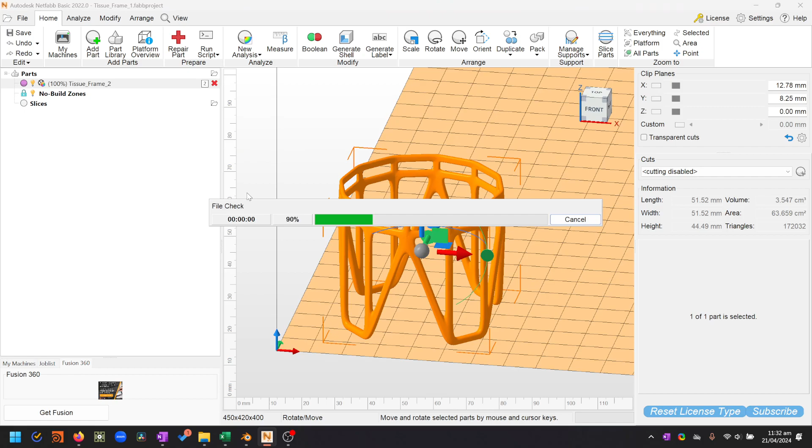So now that we're happy with this file in Netfabb, I can select it here and right click, and I can go export part as STL. So I'm going to click that, and it's going to give me some information about it. It's going to tell me the scale and everything, it's going to give me a place to submit to, and it's going to allow me to rename it. So I'm going to call this one print.

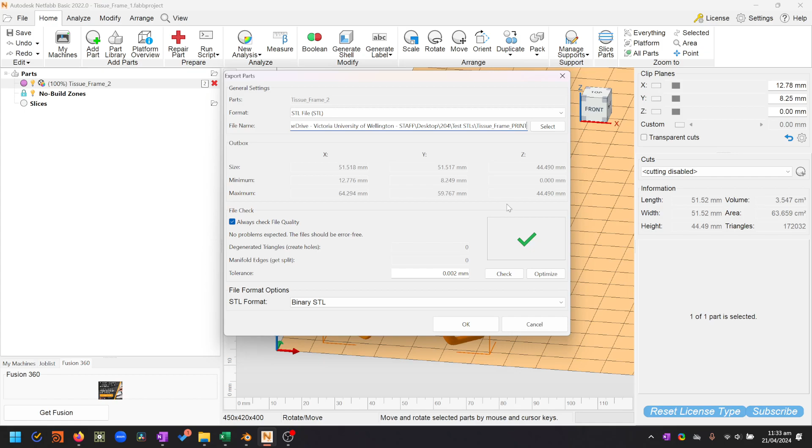And yeah, pretty much that's going to be it. As long as there's a good green tick there, then we're going to be happy with that. So let's click OK and export that.

Now let's check our file size here. So if I go to desktop, 204, test STLs, we can find our print, and you'll see that the file size is 8 megabytes, which is fine. That's perfect. And if we go in here and we actually look at our triangle count, we've got 172,000 triangles there, and that's our kind of hitting our 8 megabyte size.

So you can get away with quite a lot of detail, but I would highly recommend making sure that you're floating around 150 to maybe 250,000 triangles. As soon as things start to get over 500,000, then you're going to get towards the upper limits. And what is the upper limit? Well, if we go to Zelta 3D, we go to the website here.

What I would do is make an account, because you might use the service again in the future, and it'll make the process of getting yourself a quote a whole lot easier if you have an account.

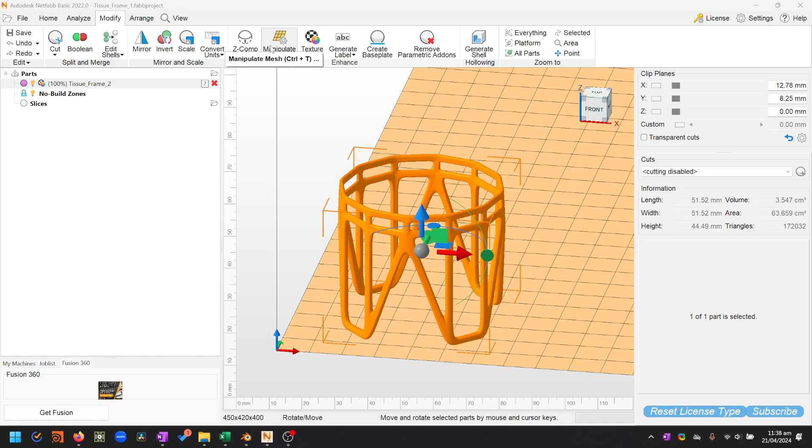Now, one of the ways we can do it is by finding our remesh or manipulate mesh here. I think there's a couple of other ways to do it as well, under prepare. Yeah, I would probably just use the remesh option here or the manipulate mesh command. So we can either select manipulate mesh here, or under modify we can also do it here. So if we click manipulate mesh, that'll give us a good preview of what our mesh structure is like at the moment.

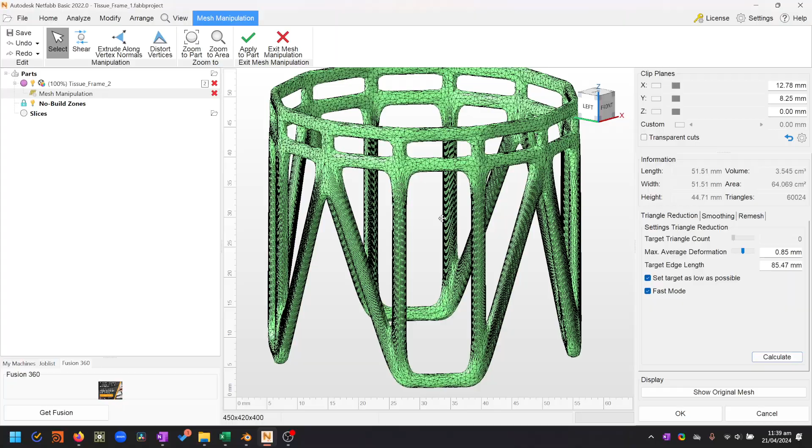And here we can do a triangle reduction by setting a few things, like target edge length. If we do this now, 85 millimeters as a target edge length is going to give us like 1 polygon remaining. So let's maybe reduce that down to 1 millimeter for now and hit calculate. And you can see it has reduced our mesh, but we've got really bad results up the top here, like some really rough, pretty awful results. And it's got us down to kind of 60,000 triangles, but 170,000 wasn't a problem in the beginning.

So I would suggest just using this process fairly sparingly, and if you're having issues with the polygon count, start with a reasonable target edge length. So maybe now we could go down to 0.5 of a millimeter and calculate that instead, and we could see what that'll do to our mesh here.

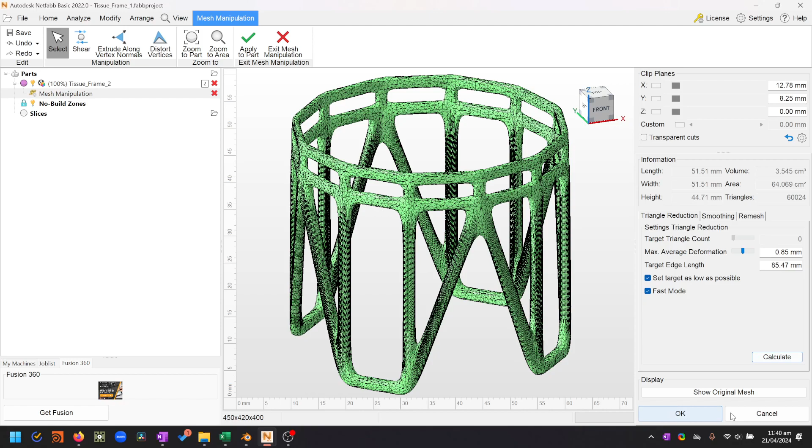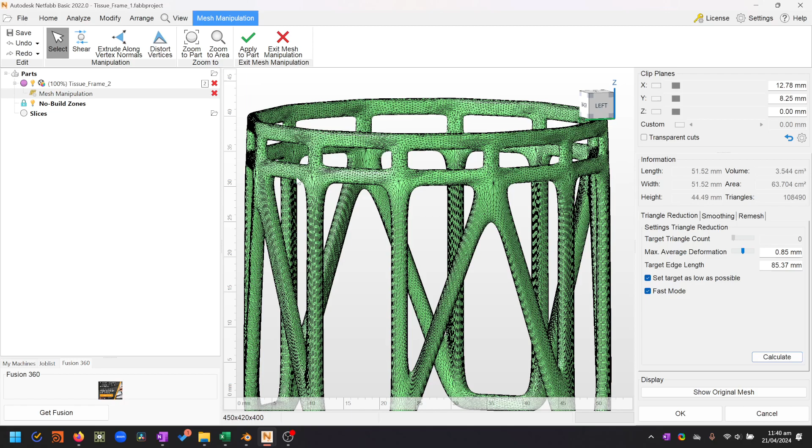Oops, maybe we need to just cancel that. Go manipulate mesh and try that again. So let's try 0.5 millimeters as our target edge length there. And you can see that we've gotten rid of a lot of that density and not lost too much of our definition. So at that scale, a target edge length of about 0.5 millimeters, or 0.3, 0.2, will probably give you reasonable results.

But again, it's going to depend on the complexity of that mesh. So you might have to do a little work if you've got a really high triangle count to get that mesh down to size. But again, it's going to be different for everybody.

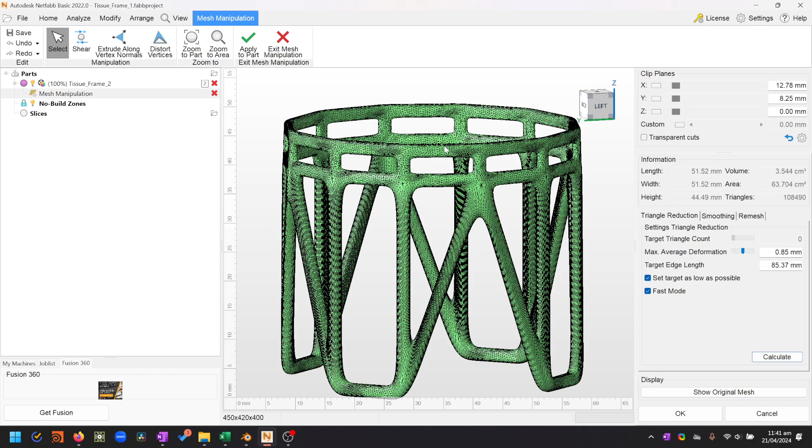The best thing you can do is come to class and talk to us about it so that we can actually look over your file as it is and help you work on it. It's not going to help if you just try and send us screenshots of stuff, it's probably going to be really tough for us to troubleshoot. So make sure that you're really engaged over the next couple of weeks because it's one of the most crucial times.

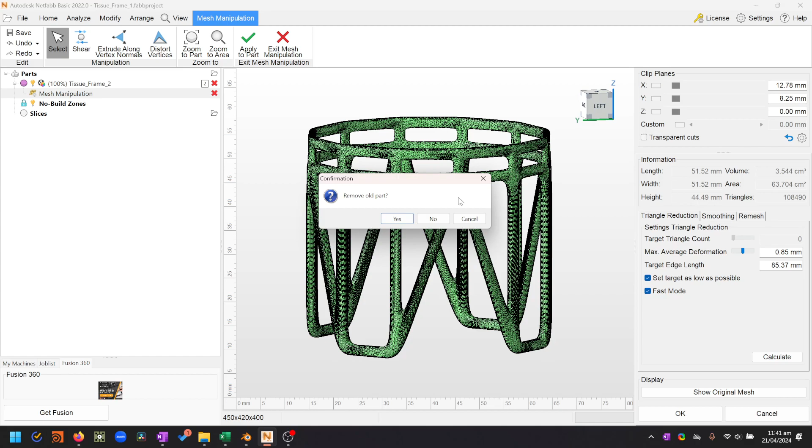So if you do any of these manipulations to a mesh in Netfabb, generally when you hit OK, it'll ask you to remove the old part. I tend to not do that. I tend to try and keep everything in a hierarchy so that I know what's good and what's not, basically, what my history of changes has been. When I select this part and go to export part as STL, it's not going to export that other part with it, it's just going to export the one part I've got selected. So it's not going to be a big deal if you've got a list of changes. It just means that if you make a mistake, you can go back without having to re-import your file and start again. So yeah, that's how this section of Netfabb works.

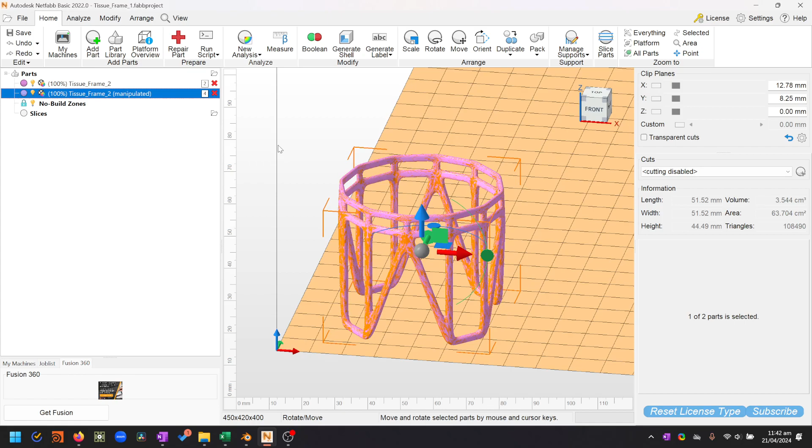I hope that will give you enough to go on for making changes or verifying that your STL files, that your meshes are printable. But again, the most important thing you can do is come to class and be engaged.